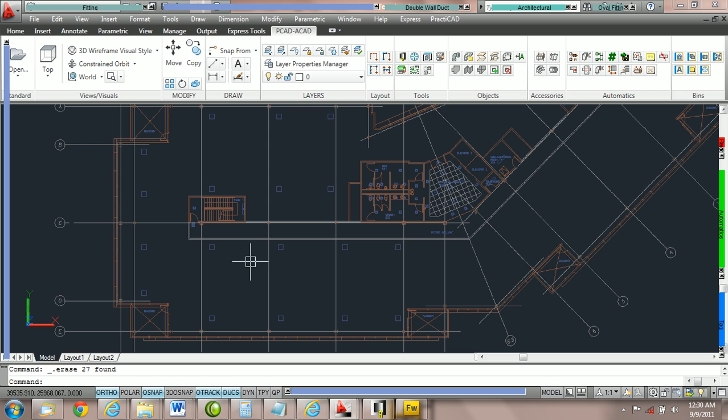In this exercise, we're going to teach you how to place down taps, copy taps, edit taps, and move taps. First, open up your PractiCAD exercise template. Then we're going to zoom in here to the two grills on the bottom.

Go into your workbox and select a zone. I'm going to choose supply. Remember that your zones and spec tables might be different than the ones you see on this tutorial. Select a zone and select a specification. Here we're going to select 2-inch water gauge.

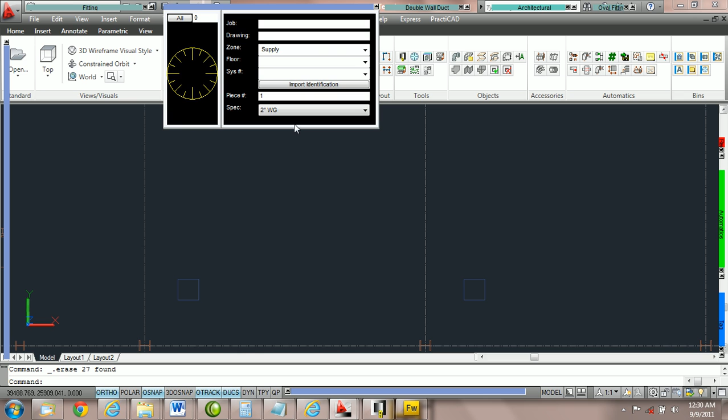Then go into the fitting parameter box and choose rectangular duct. We're going to size the rectangular duct to 42 by 24. Put the bottom elevation at 15 foot.

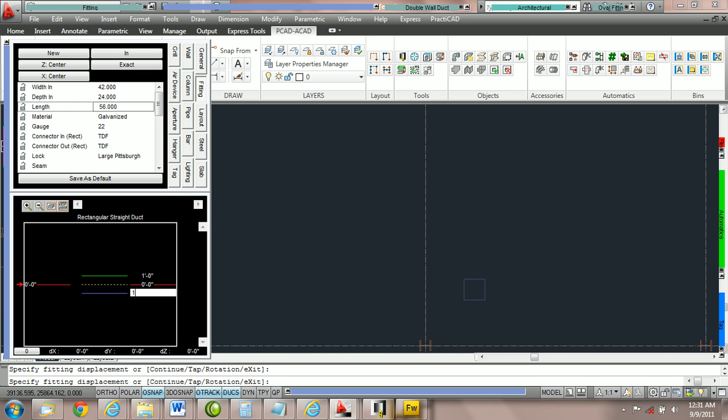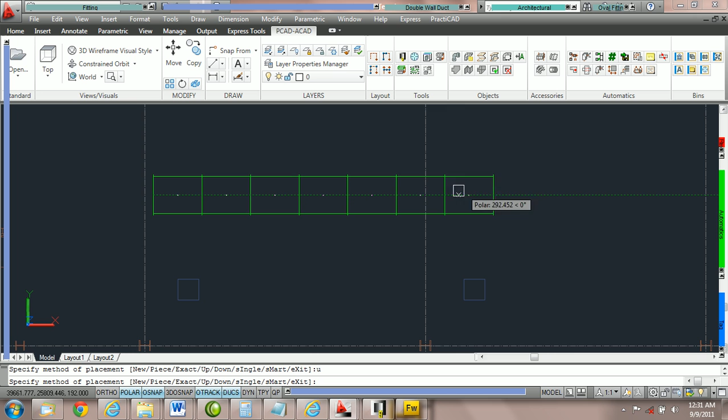Now what we need to do is draw a duct line a little bit above the grills. You can do this by sight. I'm going to click here. Make sure that you've got polar tracking on so it's easy. I'm going to click again, and then I'm going to use the up method, U spacebar, and route a duct line.

Then go to your fitting parameter box and grab the 45-degree boot tap. Go to the fitting box and change the width out by using your wheel mouse up to 14. Notice that it changes the width in as well. The 45-degree boot tap always stays at 45 degrees and it auto calcs the width in and width out.

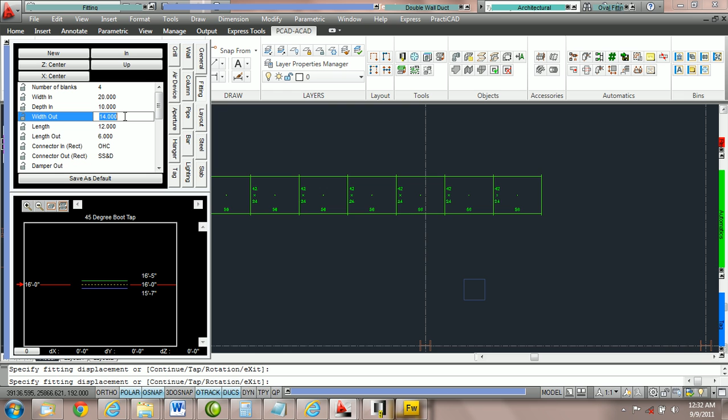Now click on your screen to get control of it. I'm going to zoom and pan. And now notice in your command line it says continue tap rotation. Hit T for tap and hit spacebar. PractiCAD should ask you to select the fitting. We're going to select the fitting nearest the grill. I'm going to click once. When we do that, we should have our tap parameter box open.

Make sure we have set fitting on in. Then go to orientation and make sure you select near for the right side of the duct. Rotation we're going to keep as 0 because it's a supply run. We don't need to flip the boot tap over. And what we're going to do is first click on in from in to side. Notice we have tap in, to side checked, and in from in to side.

I'm going to move my mouse up and down. Notice how you can just scroll it into position. You should have your in from top to side and in from bottom to side parameters equal. If they're equal, this boot tap is centered. If you change in from bottom to side to 0, the boot is at the bottom of the duct it's attached to. Here I'm just going to roll them both until they're equal. Going to give this one 7.

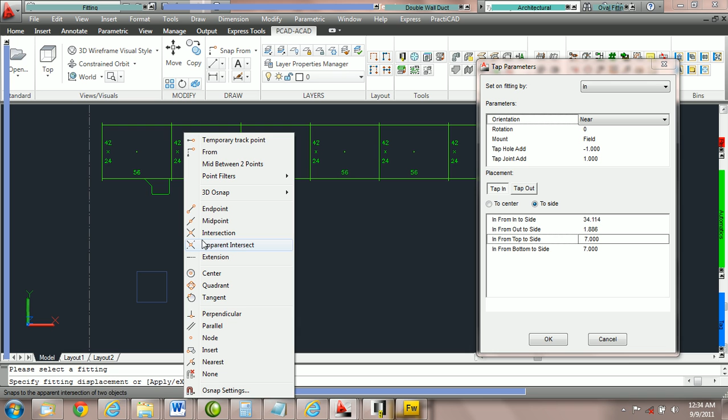So I'm going to hold the shift key down and right click. And I'm going to choose midpoint. And then AutoCAD should give us a midpoint to attach to. Once we have the midpoint lit, click once. And dependent upon whatever routing method you choose, PractiCAD should start routing duct.

Now, in this exercise, I'm going to switch it by hitting M spacebar to the smart method. That will extend the straights of the boot. But notice you can change it from E spacebar to exact or U spacebar for up and choose which method will work best. I'm going to hit M spacebar for smart. Then I'm going to click on the corner of the grill.

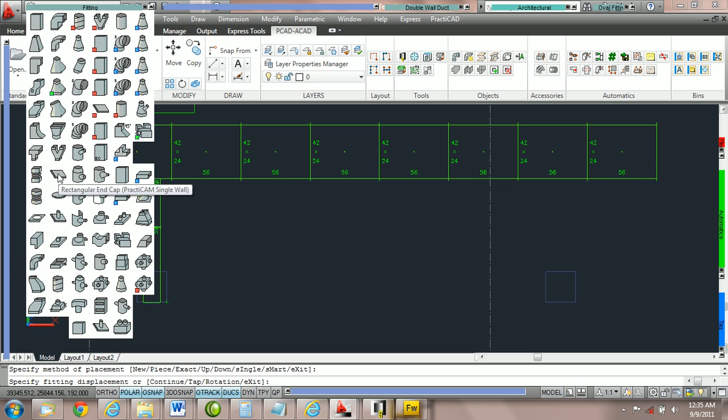Now go up to your fitting parameter box and find where your end cap is. In my bin, the rectangular end cap is right here. Going to click on it and then hit C for continue, spacebar. That should snap the end cap with one click to the end of the duct line. Now we're going to move this over 48 inches. Hit escape to let go of your fitting.

Then we're going to click once on the boot tap. Since everything's connected, all we have to do is move the boot tap over and all the duct afterwards should go with it. You should have the in joint highlighted. Notice that I'm on the in joint and therefore we have a blue node representing the in joint. I'm going to click my mouse on it and pull the duct over.

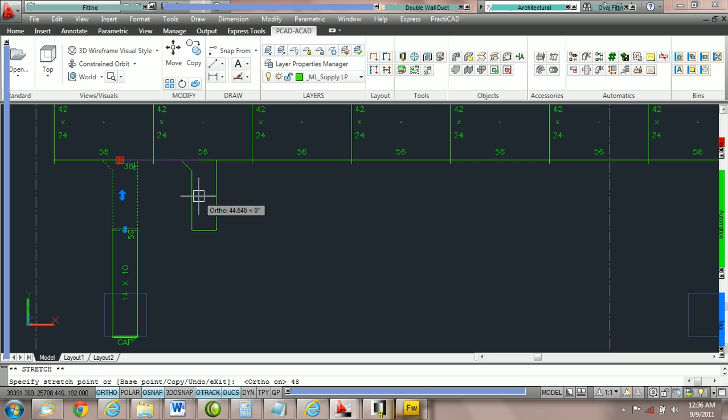And right here, I want you to press F8 for ortho. And notice that we can now cleanly move it up and down. You should have ortho depressed down here in your snaps. So now I'm going to move it up and down the line. We're going to type in 48 and then hit enter. And when we do that, it should move it over 48 inches.

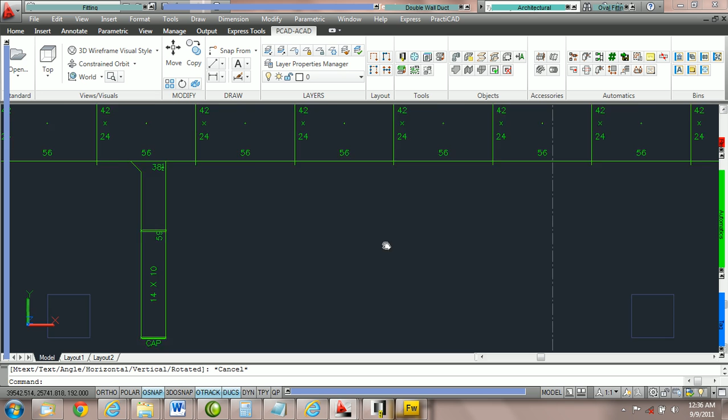You'll actually notice if we do a dimension line from the midpoint here to here, that is exactly 4 feet. So we've done it correctly. Now we're going to copy the tap over. Pan your screen so that we can see the tap here. We're going to copy this duct line over to this grill.

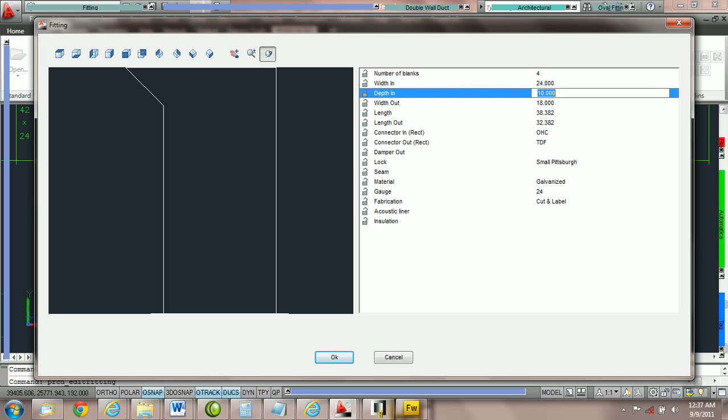First, click once with the left mouse click on the boot tab. Then right click and go to Edit Fitting. Click on Edit Fitting. And notice here we can change the parameters of the duct. I'm going to change the parameters to 24 width in. And then press OK. That is how to edit the duct in place.

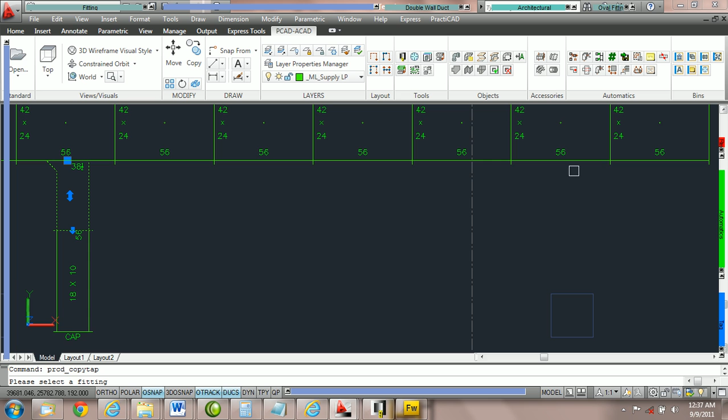Now to copy the duct, we're going to right click again and go down to Copy Tap. When we do that, PractiCAD should say to please select a fitting. Select the fitting close to the grill. You might need to pan your screen over. But right now we should have the crosshairs. If you click on the screen, the boot tab should be following.

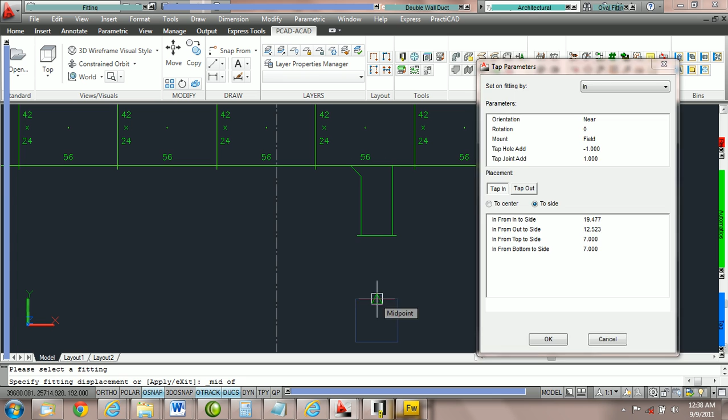Once again, I'm going to shift right click and grab the midpoint. And then hold the boot tab where I want it to go and click once. Now we've copied the tap over successfully. To make sure we've done that correctly, highlight the area and then click on your duct line check to make sure you don't see red marks in front of the boot tabs. Here you can see we've done it correctly. To remove the marks, let's go back into automatics and click duct line check again.

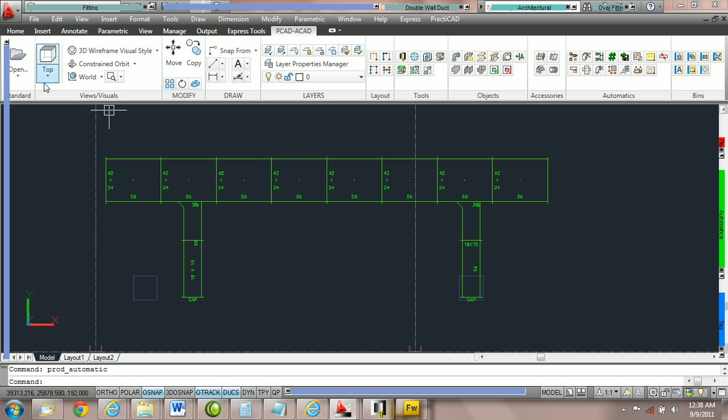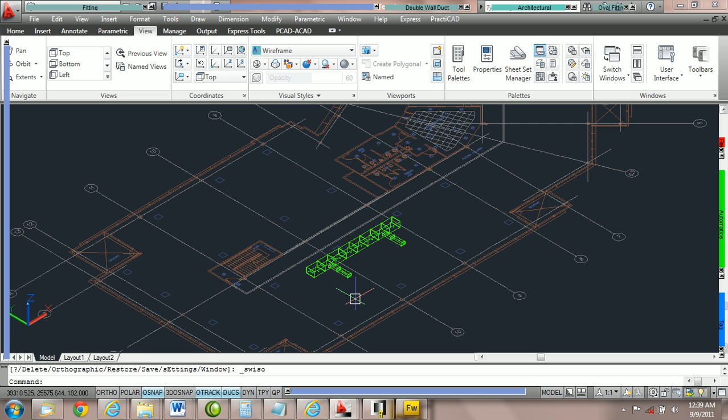Now, take your drawing and put it in Southwest isometric view. On your ribbon, you can also access that from the view panel, and then you should be able to choose the choice you want. You can also get it from view in the menu bar as well. It all depends on what you have turned on. I'm going to zoom in to our duct.

Now let's edit it from the property box. We can right click and do edit fitting, or we can edit the taps from the property box. Going to click once and then right click and select properties. You can also double click on your fitting. Go to the tap parameters in your AutoCAD property box.

Take a look at what you have for a value for in from in to side. I'm going to add 3 inches to that value to move the whole duct line over 3 inches. On my exercise, it says 17.119, so I'm going to type in 20.119. Move your tap 3 inches over the same way.

Now we're going to change the elevation. Go to where it says in from bottom to side and note what value you have here. We're going to move the duct down 3 inches. All we need to do is subtract 3 inches from this number, in from bottom to side, and I'm going to type in 4 on my screen and hit enter, and that will lower the duct. You can see the elevation of the duct line by looking in your elevation box. Mine's at 15'7".

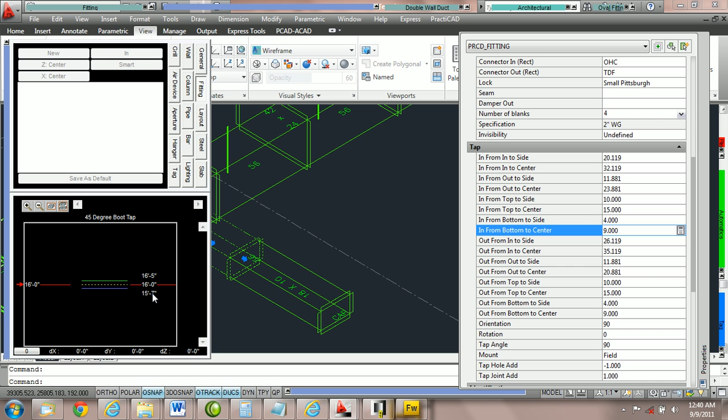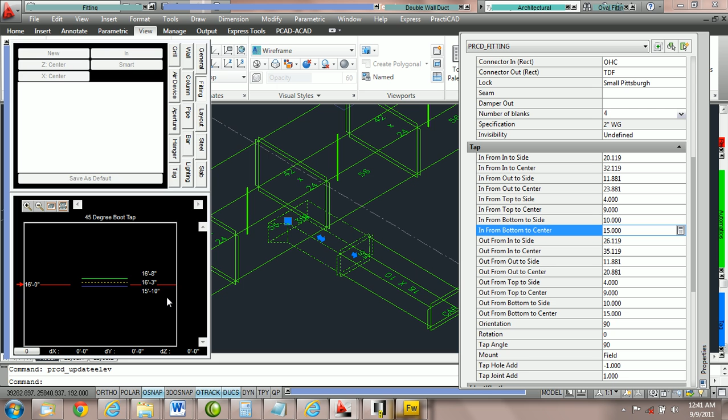Take note, we can change it here, but if we pick an elevation that raises the duct off the main trunk line, we will get a break. And therefore duct line integrity will be broken and we will not be able to edit the entire duct line later. However, if you raise it through the elevation box an amount that keeps it attached, it will work. For example, here I'm going to type in 15'10" and move it back. Notice that the duct is still attached using duct line check because we've done it correctly.

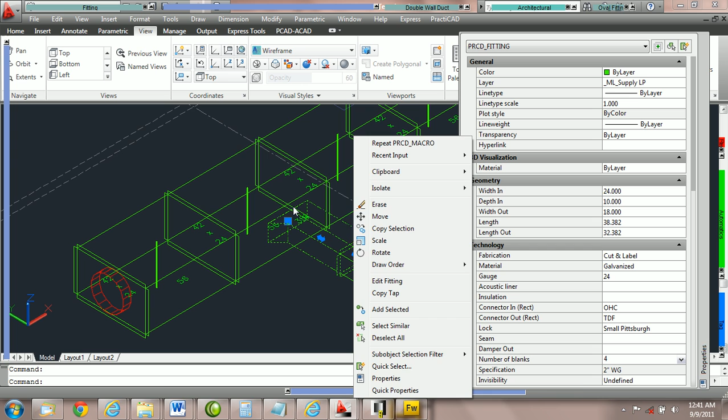I always recommend editing the duct from the AutoCAD property box first. If you're going to edit the fitting, edit it here or right click edit fitting. And if you're going to copy the tap, use the copy tap feature inside your PractiCAD options. That'll conclude the exercise on taps.